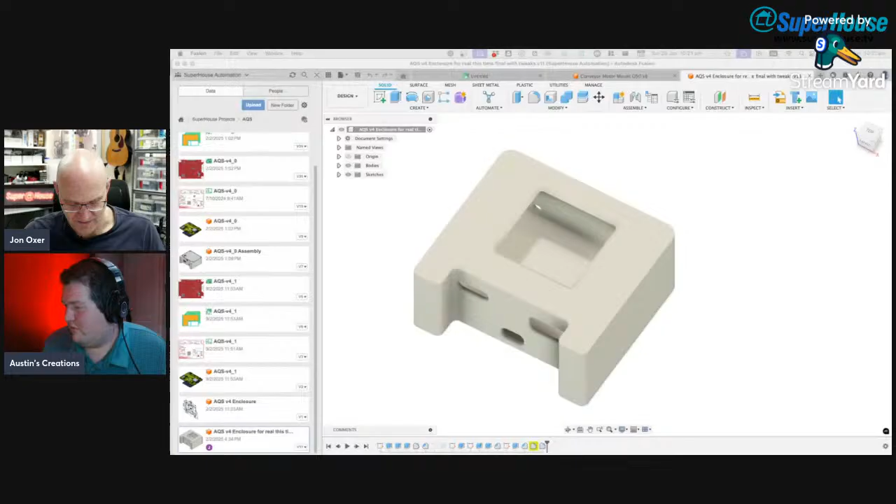I have one of those Launch scan tools, I got mine a while back. I wonder if I can find it, now I know my model's long discontinued, but let's see if I can find it in my Amazon order. So the one I have is the CRP123, and it works fantastically. And then for the advanced stuff, I have my 4 scan on my laptop.

Ooh, case design, yeah. I'm going to suppress those. So yeah, I'm just going to. Alright, I'll explain a little what I'm doing, and then I'm just going to do it without talking about it, and we can continue talking about other things.

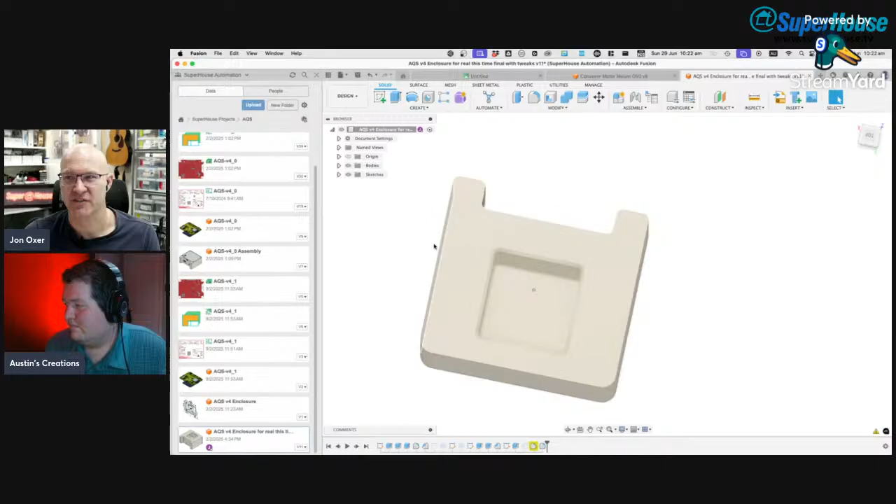What I said to Austin just before the stream is that what I was going to do was do a slight update to this enclosure for the air quality sensor to remove the top buttons. And then I'm going to send the enclosure to the printer. So hopefully by the end of the stream, I have the enclosure that I can show you. So that is all I'm doing.

Body 1, body 2, yeah, body 1. So I'm going to save that as a mesh. And what am I going to save it as? I'm going to stick it somewhere, not there. Where am I going to put it? I'm just going to stick it on my desktop for now, like a caveman. AQ, not AGS, AQS body.

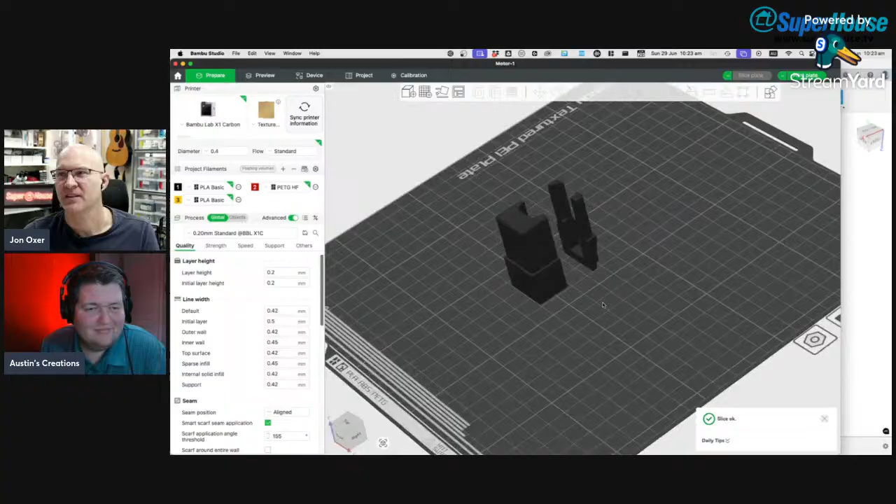And then I can pull it into Bambu Studio. Oh, what is currently in Bambu Studio, because this is what's on the printer right at this moment, is something else that Austin and I can talk about, which is conveyors. This is related to the drive motor for the little PCB conveyor. And I've just, in fact, if I come to device and start the video stream, so we'll have a look inside my printer. You can just see the top of it at the bottom there. That is where this print job is that's just finished.

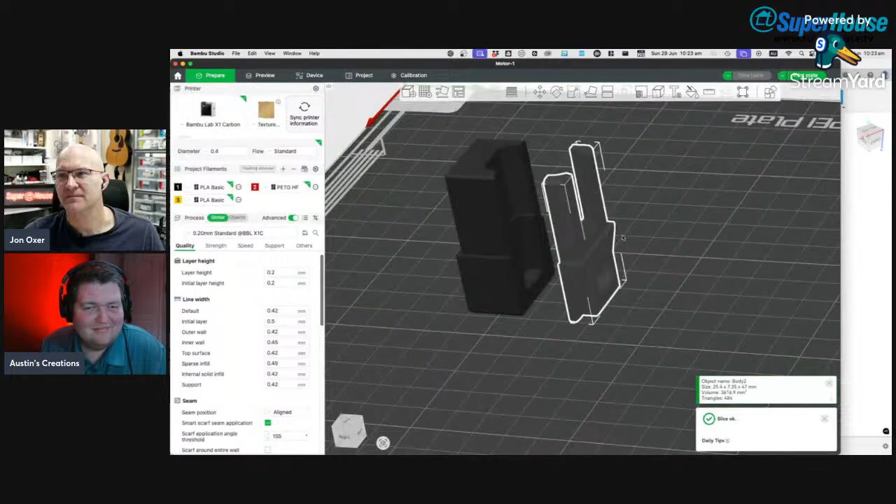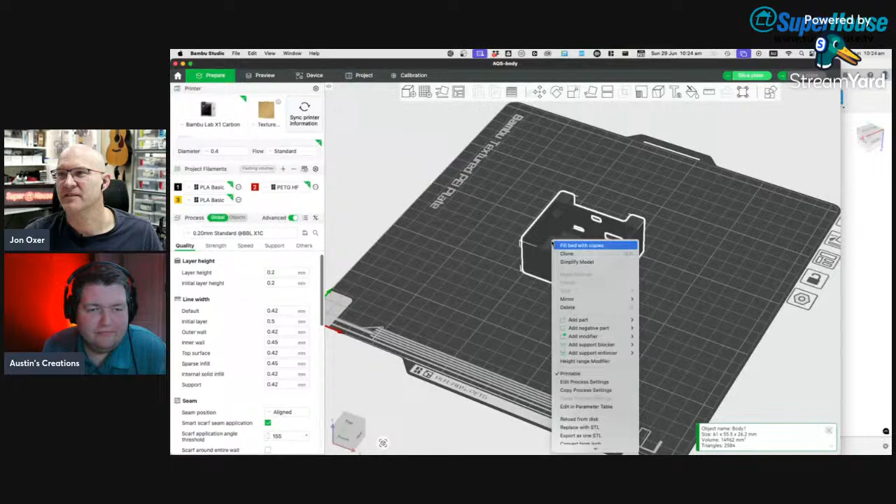So I'm just going to load up, once again, desktop, and AQS body. Yes. And that is the wrong way around. I want to stick it on that face and change it to yellow so that we can see it.

So Austin, I'm going to make you an AQS and send it to you. Do you have a particular preference on color for the enclosure? No, I do not. Okay, I kind of like doing them in white because it makes it look slightly Apple-ish.

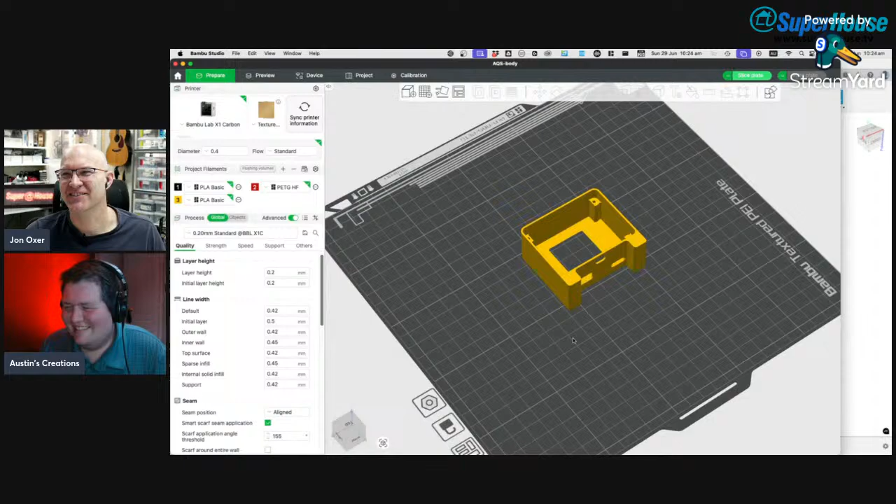Let's avoid white. White doesn't stay white in this workshop. So I could do white, black, yellow, red. I've got hot pink filament which I use for making spray covers, so that'd be hilarious and make it stand out. Sure, why not? Send a pink one. Let's make this a big live stream.

For now, I'm going to print this one in yellow, just because it's easy to see on stream. With black things, if you hold them up like this, unless you got the lighting just right, it's very hard to show on stream.

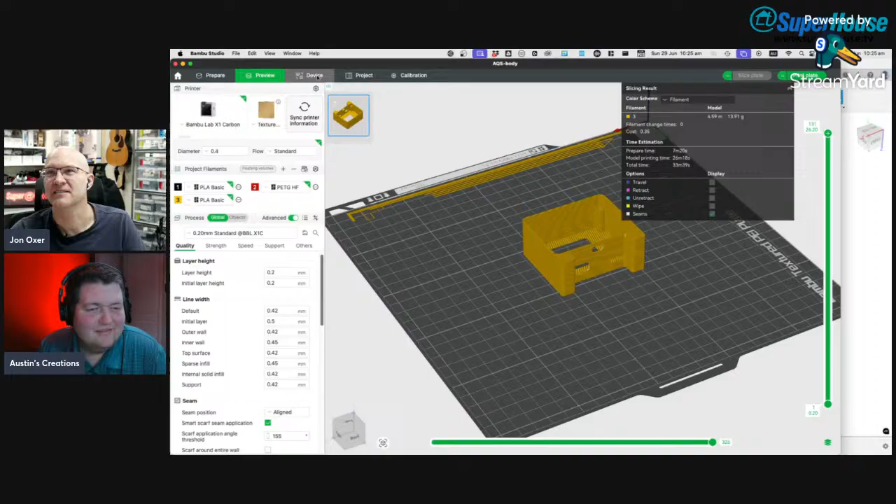So let's send this one off to the printer. Oh no, first I have to get the last thing out of the printer.

So do you want to talk semi-publicly about any conveyor stuff? Because I know, Austin, that the conveyor project you're working on is for a client. Oh no, I'm happy to talk about this one.

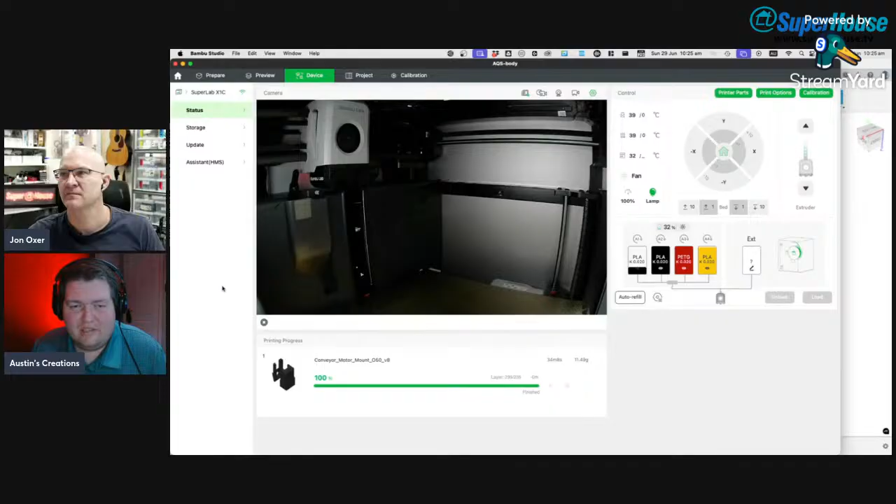It was actually just before coming to Jon's stream, I did some streaming as well. And I was working on a little bit of my project. Actually, do you want me to screen share it? Sure, I'm just going to send this to the printer.

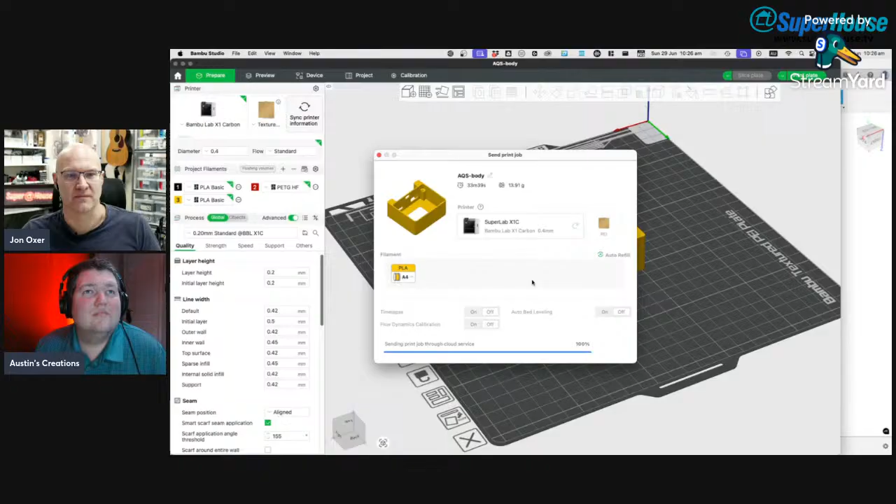That one, PLA, yes. In just a second, I'll pull Austin's desktop up to replace this. I can hear the printer starting, it's doing its calibration thing. Okay, so I'm going to get that out of the way and switch to Austin's desktop.

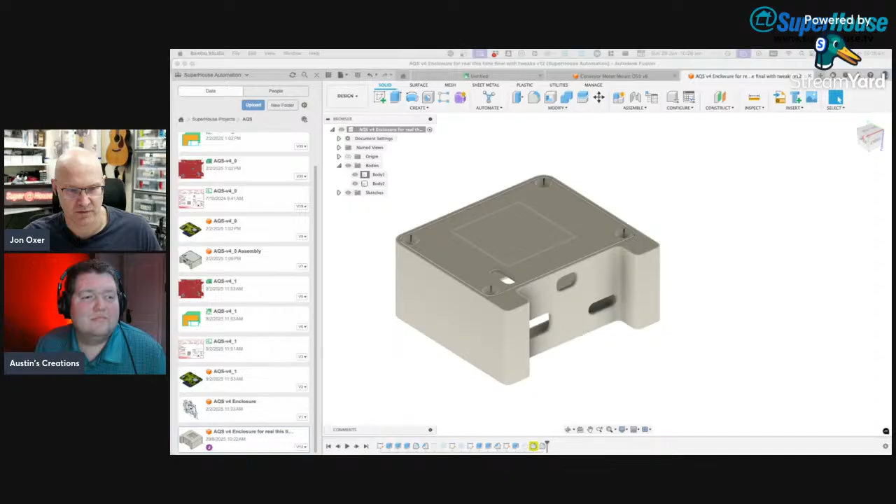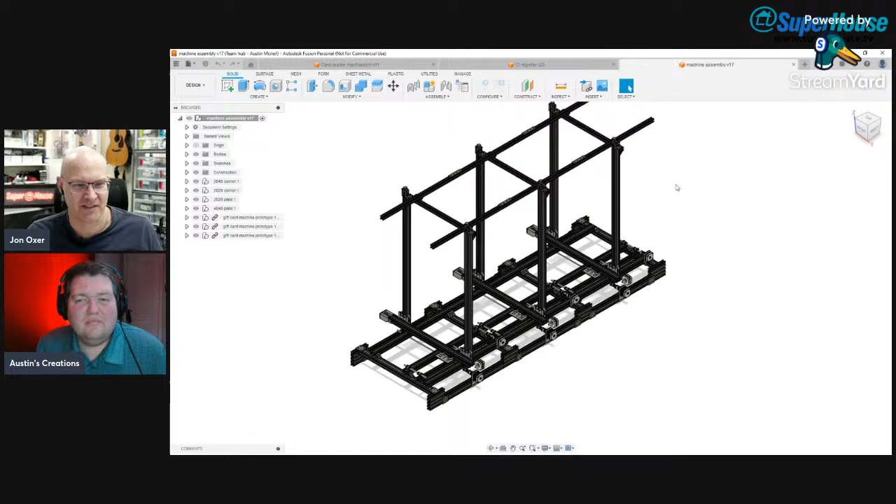I'm going to remove - oh yeah, add to stage, that. Remove, add. Okay, go for it. It's got a comment about, did you unload the last print? I don't need to, unload the last print. Yeah, you did. Yeah, unload. I have it in my hands right now so I can do a test fit. So I'll do that in a moment.

So I have a client, it's a nonprofit. They do handling of donations for some of their uses. Most of them tend to be physical items, although they're trying to get away from physical donations, just because you got to put it somewhere, you got to track it all, and it's a lot of work for people.

One of the things they do, and others do, is they go through gift codes. There can be times where they'll buy their own gift codes as well, simply from a financial standpoint, because they either have surplus budget, or getting credit cards for managers at times can be complicated. And obviously you can't hand out your credit card to a client either. So if you're giving them a gift or helping them buy something, a Walmart gift code can go a long way.

But again, it's when you're talking 10,000 plus gift codes in a year, that's a lot of tracking and a lot of hands-on work, people that have to fill out paperwork. And presumably there's a lot of variation too, because people donating these could get gift cards from any random store. It's a pain in the butt for companies that don't let you check the price on a gift code online. Sitting on hold and punching in numerous code numbers to find out their registered value is so tedious for volunteers.

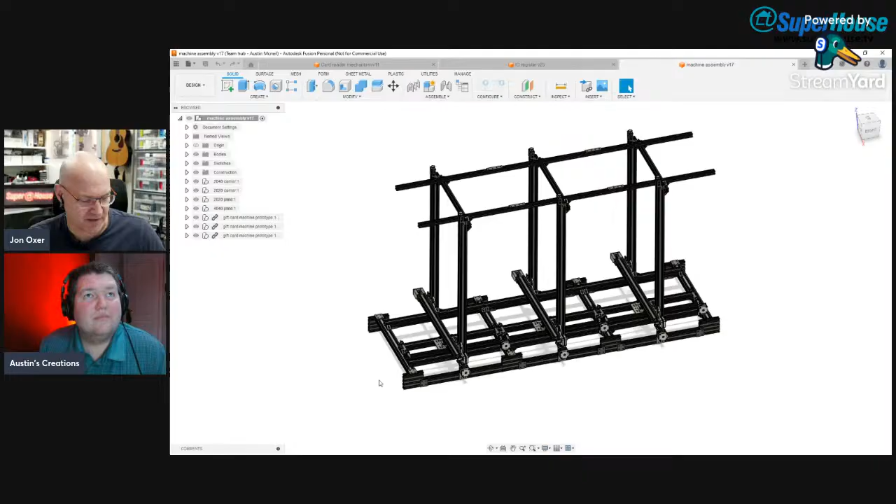So when you say an ATM, what you're talking about is somewhere that someone can walk up with a random gift card, they put it into the machine, and it's then processed to analyze the card, figure out what balance is on it and whatever else you need to do.

Yes. So it dispenses the card? Is this in an internal tool, or is it in a public situation? No, it's internal.

I picked up a 10.5 inch touch screen with a nice glass screen, designed for Raspberry Pis, but it has an HDMI input, so it's connected to a tiny Lenovo workstation machine. With help from Tinker, we found all the small loopholes for locking the machine in kiosk mode, so that as it boots up, all it gives you is a web page that I can point at the server for. It doesn't let you do anything I don't want you to do with it.

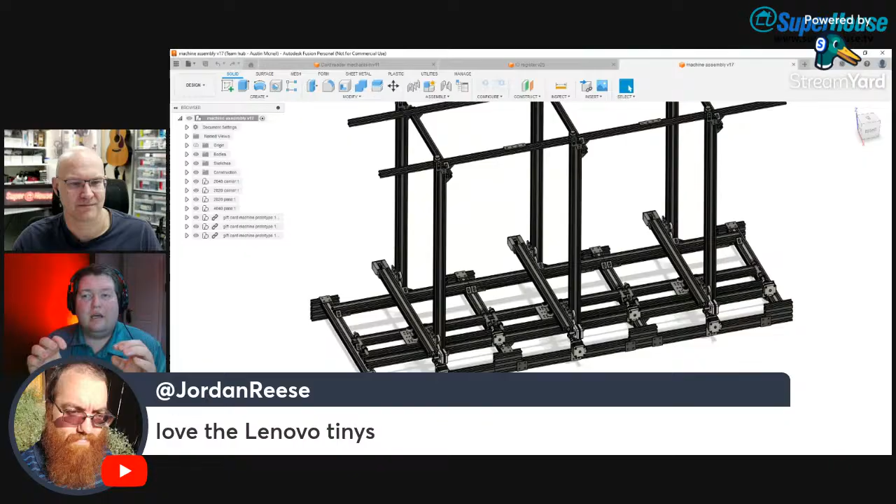And through that, combined with the fact that all staff use an RFID tag for building access and printer access, that will give you access to this machine. There'll be a web page where staff can see the inventory. Through that, they can group codes for a particular client, and the supervisor can go in and approve transactions. Once approved, you go to the office, the machine spits out your order, and you take it away.

As opposed to right now, where there's roughly 8 different people that might be involved in the process of signing out cards. It has to stay in someone's office, and you have to hope there's a supervisor on site with a key readily available. Otherwise, you're waiting around for it.

So it's hopefully going to cut down on hours generating reports, people waiting around for things, and cards that potentially sit stagnant because you don't know they're available. Because if you're getting a variety of brands, sometimes somebody might just be in a rush and not pick something that's potentially more meaningful.

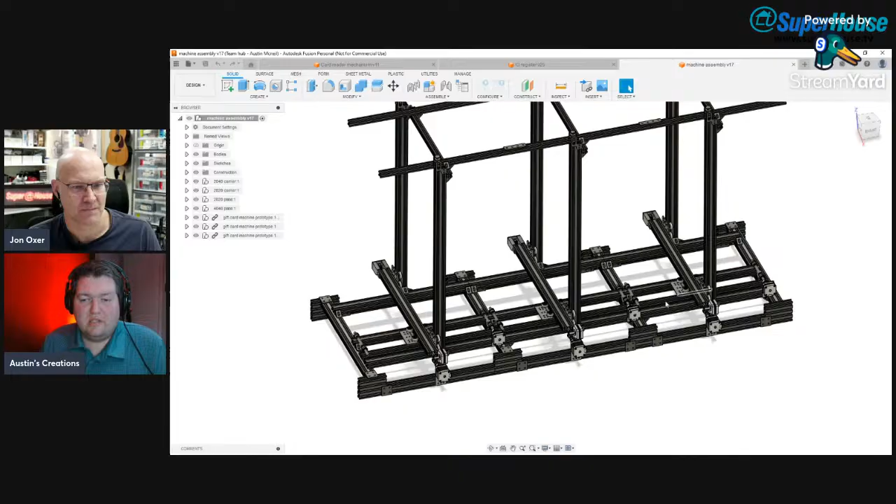So the core of this machine is a central conveyor belt that sits along the bottom here, using standard off-the-shelf 3D printer parts, rollers, and such. Everything has bearings on it so that hopefully it can be durable and long-lasting, but also maintainable and repairable. There'll be quite a few 3D printed parts, but I'm trying to limit 3D printed stuff to things that can sit statically and not wear down and break as easily.

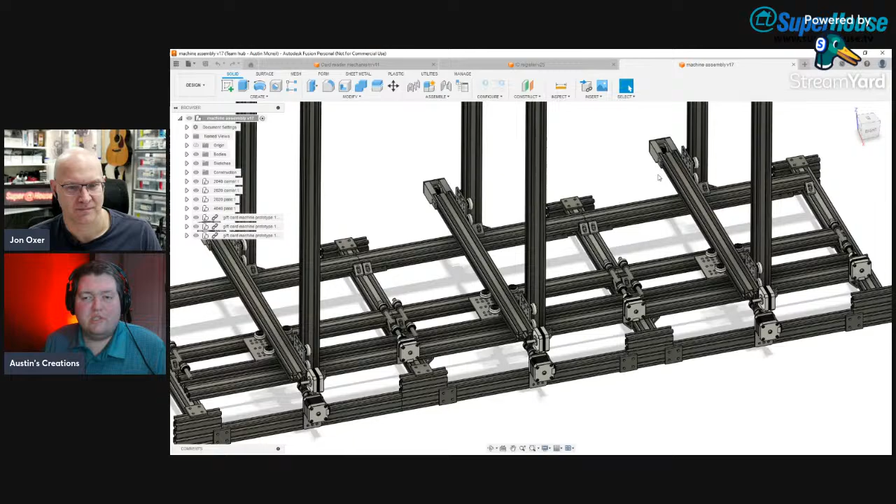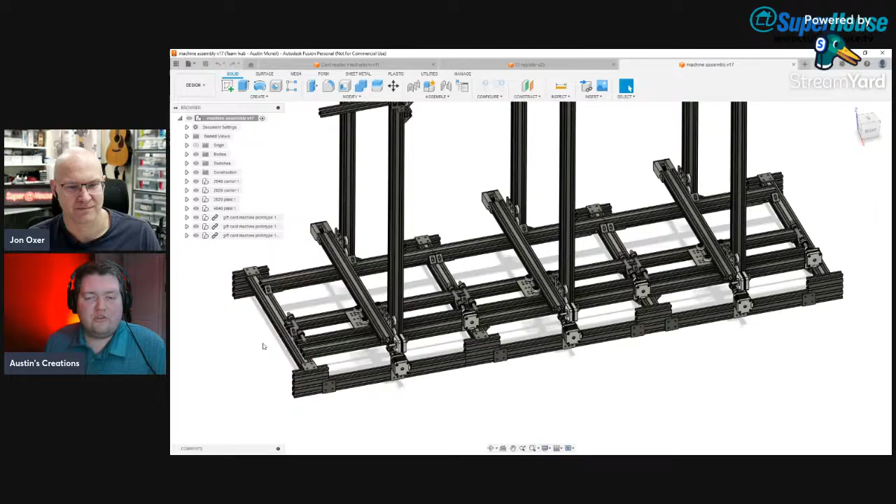With these gantries, the idea is there'll be sets of shelves on both sides, and it'll be capable of picking cards off both sets of shelves. It will query a database to know where all the cards sit and which way to dispense them. The idea is a code comes in one way, there'll be an elevator or something on one end so codes only travel in one direction, allowing for an infinite loop and hopefully faster processing of codes.

To process codes, it leads to this mechanism where you're inputting codes from the front of the machine. The code essentially has to turn 90 degrees, and that's where this turntable comes in. It's got a motorized wheel that'll pull the code in, the turntable can rotate, and then spit the code out through a ramp onto the main conveyor.

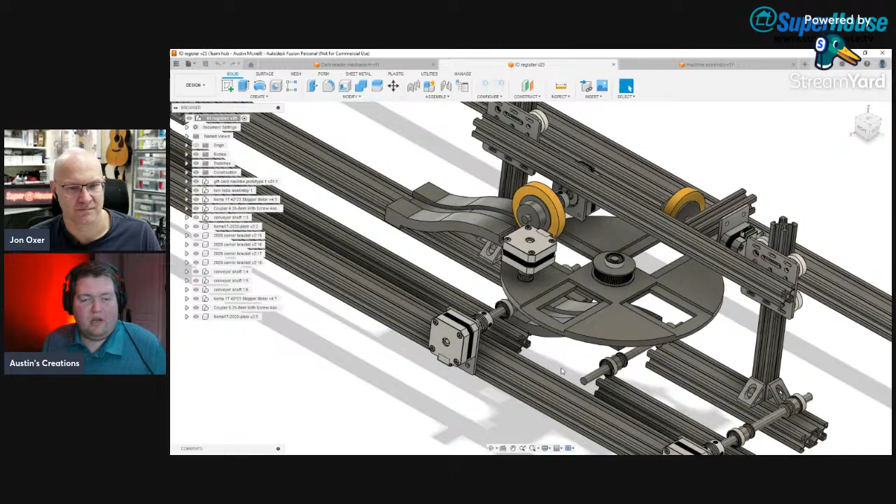The ramp is high enough that codes coming up from the underside conveyor, which isn't currently modeled—this part has to change, it's just a placeholder to remind myself—will come up onto a conveyor belt if it's a code that's actually wanted and didn't misread. It can spit it out and drop it into a hopper for the user to grab, or it can reverse the belt, and there'll be an opening to send the code back onto the main conveyor and then back onto a shelf.

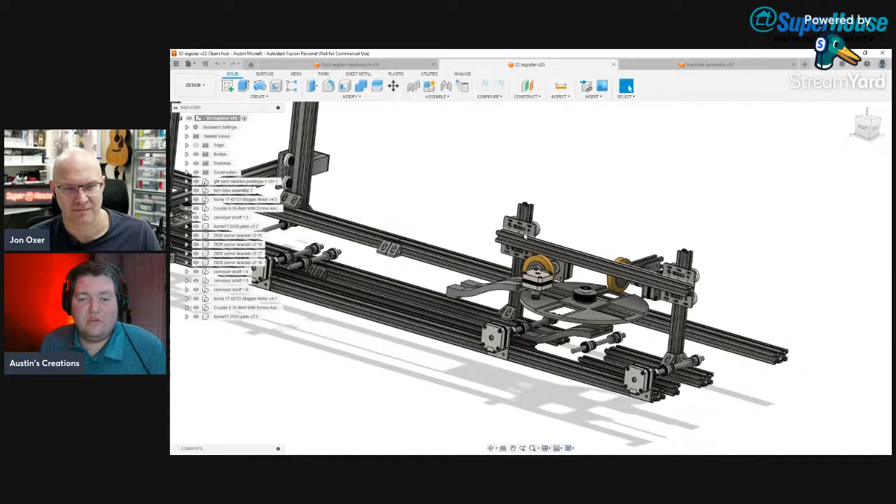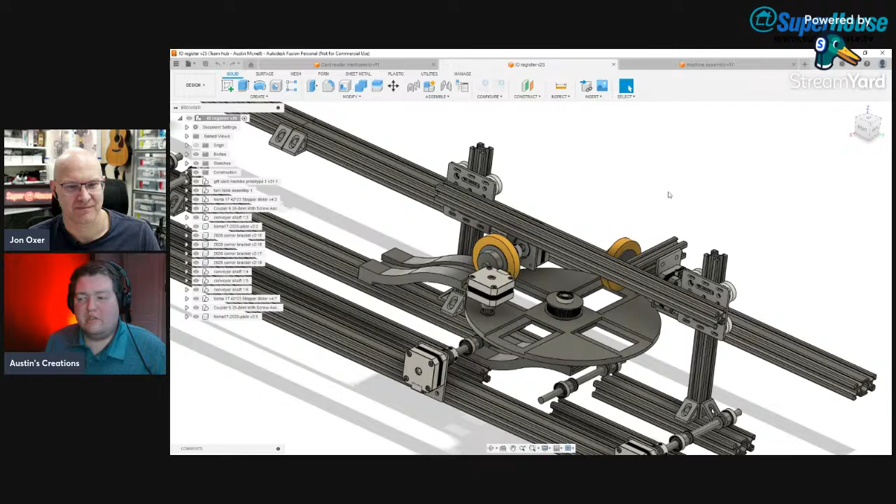The reason these motorized wheels are on these gantries is that I'm going to build a follower cam onto this turntable, so as the table starts to turn, it'll lift the wheels off so they're not dragging against a code or hitting the edge when it tries turning. It's just not something I've modeled yet because I'm focusing on providing the client with a relatively accurate cost sheet, so I'm trying to find all the parts I need first before getting into the intricate parts.

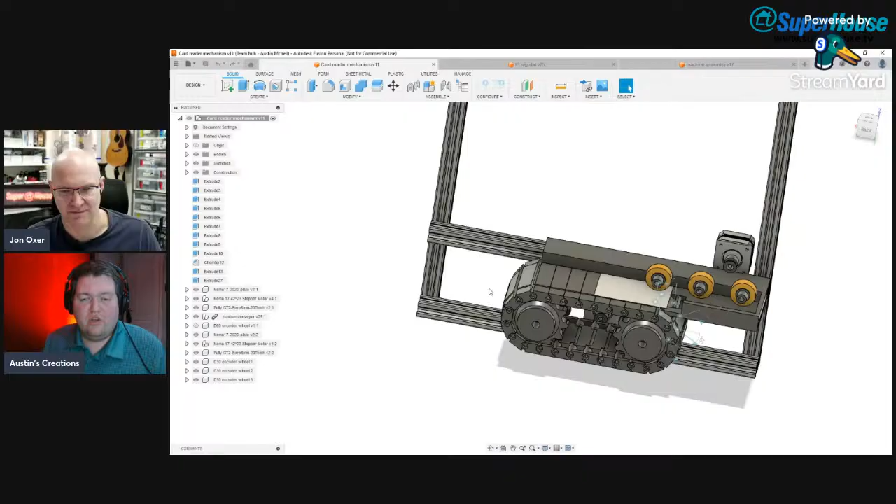But obviously there's a bit of a gap here for the code to come in, and so far the machine still can't tell you what the code is, which leads to the third mechanism—this was what I was streaming a little bit of today—which is I found a model on Thingiverse for a 3D printed conveyor belt.

I thought it was a good design, so I've beefed it up a lot and designed it with a belt drive here. But its main goal is to be able to read a code. So I was telling Jon this before the stream.

The problem with modern gift cards is they can work in one of three ways. There might be a magnetic strip to read, there might be a barcode, or there might be a QR code. It can have any combination of the three - it could have all three, it could have one, it could have two, it could be a mixture.

Ideally, for myself, I find the barcodes and the QR codes tend to be the nicest, not just from a usability standpoint, but the magnetic strip read head is only good for a certain number of cycles. So you also want to limit that cycling if you can.

But the annoying thing with gift cards is the only two things standardized on a card is the magnetic strip - the type of data it has, the order of that data, and its position on the card - and the size of the card. Those are the only things that are standard.

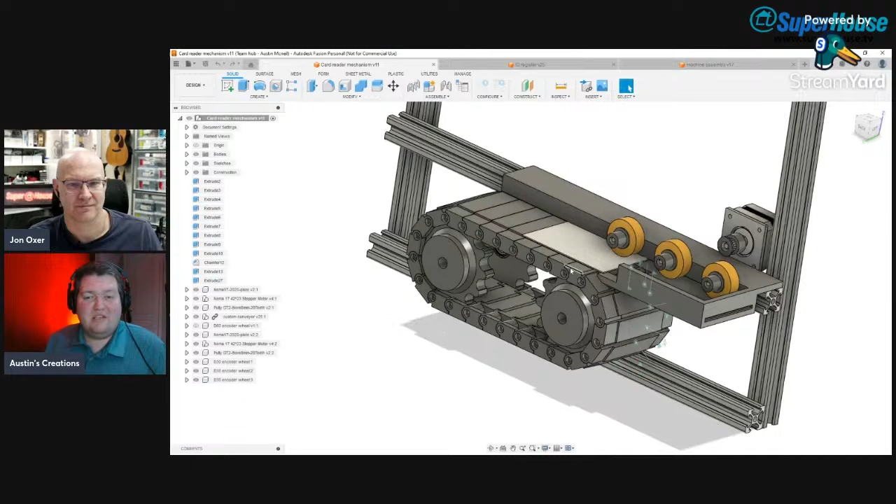So the problem you run into is if I wanted roller wheels to push the card along a set of rails, the wheels are either going to block the magnetic strip or they're going to block the barcode and the QR code, because they can be anywhere on that card in any orientation that the manufacturer decides. If I put the wheels on the bottom, it needs something to push against, otherwise it's going to distort the code. And if I try to put any set of rails anywhere, again, I could end up blocking the data I want to scan. So my best bet is some sort of belt.

So I started modeling this belt in a way that it has this pusher arm. There'll end up being more links that have the pusher arm, so that once the code has gotten into place and it's past all the roller wheels, the belt itself can push the code along into a position that I want. There'll be a magnetic read head that I'll design to actually fold out of the way, so it's only being worn down when it's needed.

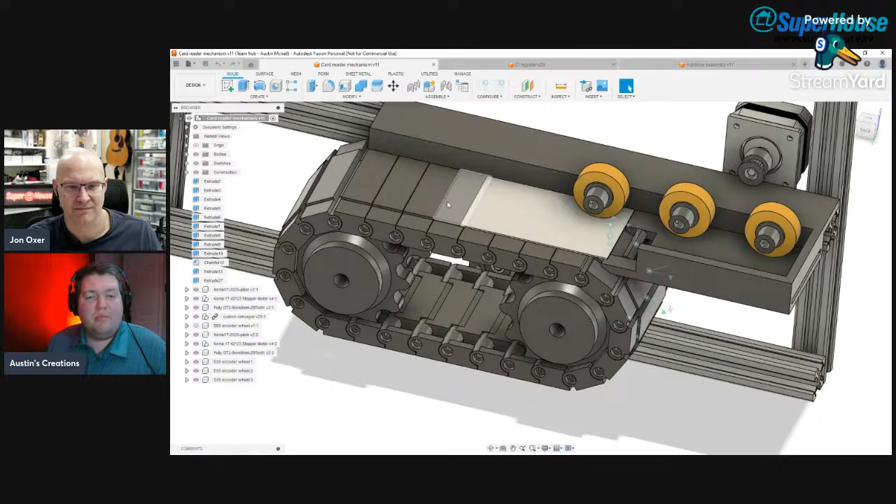And then this pusher would just ramp up the speed of the motor to push it at the right speed that it can read. Otherwise, it can stop in a position, and there will be a gantry that sits above that can hold the scanner module that can read the barcodes and whatnot at the correct read distance and be in position, but also move should a card decide to have the codes in a different spot. And this module is essentially what's going to handle cards going in and out.

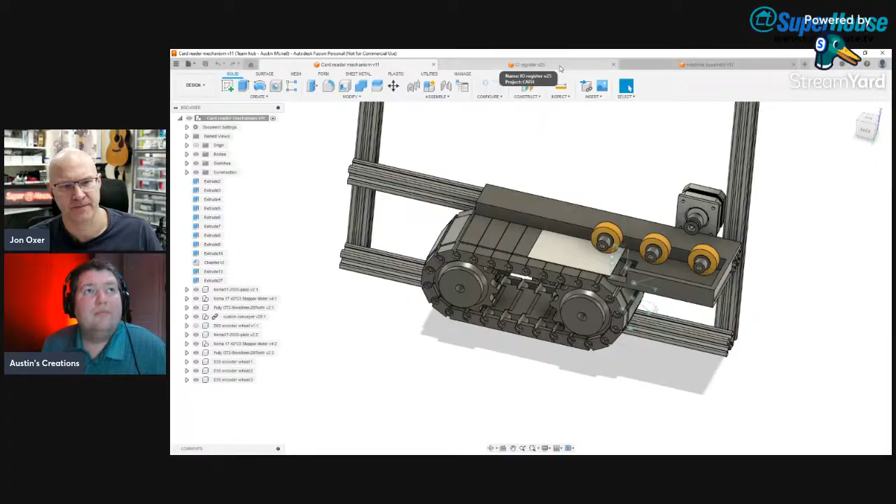So ideally, I'm going to handle it in a few different ways. I kind of want to build a JSON config file that'll have the various codes, and that can... what do you call it... dictate where it's looking.

But so even you would have pre-configured card types - you're not talking about a situation where you're dynamically trying to detect where the read location is or the location of a barcode. I have found even with the readers, sometimes it helps moving it slightly, so like that little bit of jitter would be programmed into it just to help it actually center itself. But in general, I would tell it like, I'm trying to see if I can find one of the codes. Most cards have the barcode along the long edge.

I did see one in my collection here - like Amazon has started using QR codes. Yes, I'm showing the cards on camera. They have all been used. You're welcome to waste your time.

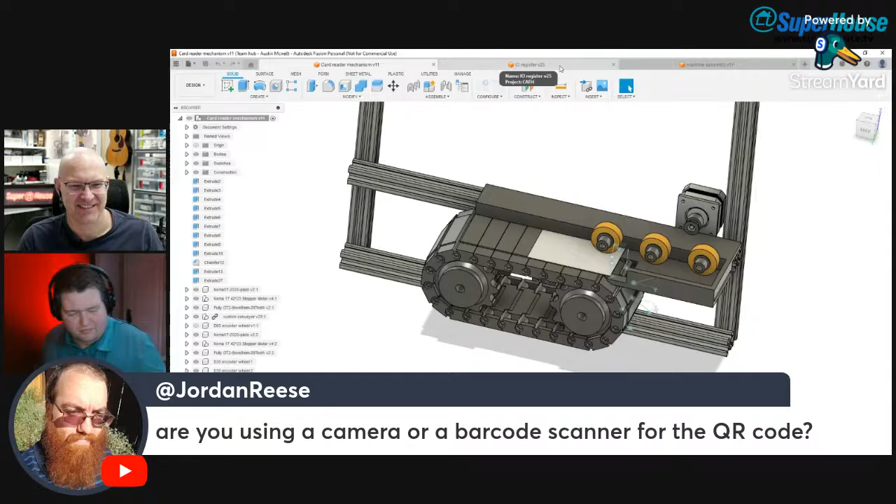So Jordan asked whether you're using a camera or a barcode scanner for the QR code - I'm using both. I have a camera-based module. It's the same module used in my inventory scanner.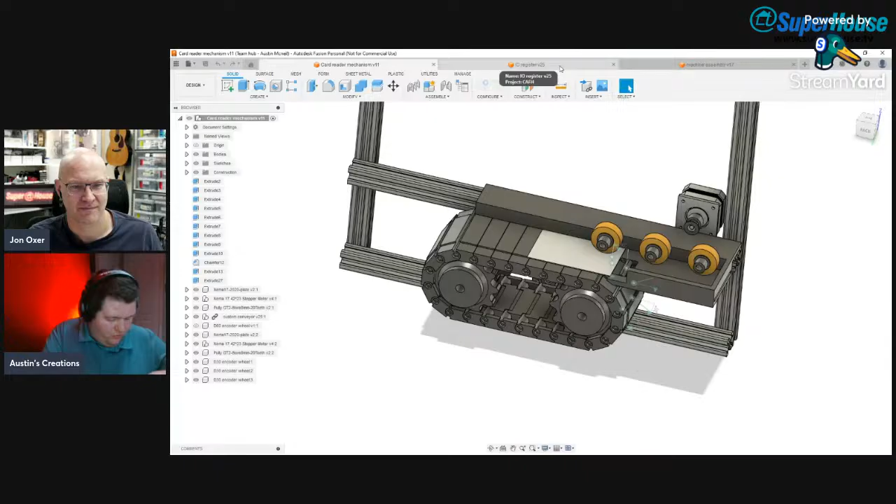But I found the camera module has to be way too far away to read the barcodes, especially the ones that are ridiculously long. And then this is an example of a code that's put sideways.

And then you have this one, which is a camera based module. This is capable of reading QR codes plus barcodes. But if I wanted to read a barcode like this, I'd have it easily 200 millimeters away in order to read it, and you'd be doing this to try and get it to align, and it won't work. You definitely won't read the, I think it's like a 10 by 10 millimeter QR code, so you've got to have this thing right up on it. So rather than using one or the other, I found it's just better to use both, at a more appropriate height, so I can deal with the different situations.

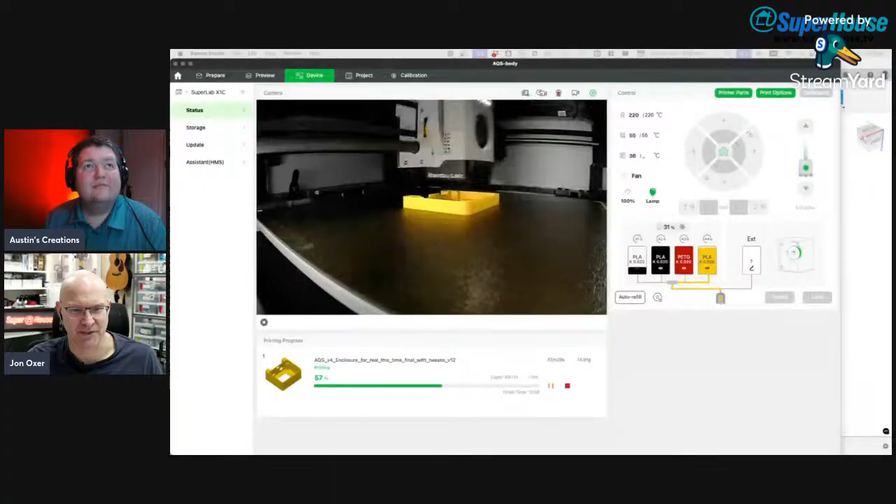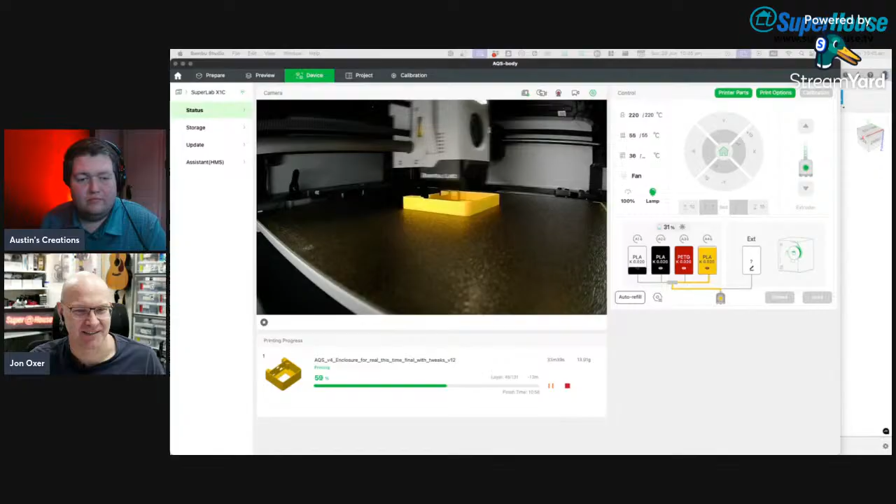That's really cool. I'm just going to briefly bring this up. So this is the progress on printing the AQS enclosure. Where are we at? We're at layer 44 of 131, 58% done. Those two numbers do not seem to compute, but that's because most of the printing was in the first few layers where it was doing the front face, and now it'll rip through the last 90 layers or so pretty quickly. So we will return to that.

And the other thing, okay, so there was an interesting... sorry, my brain just did the thing where I was saying something, and as I was reading a comment, words from the comment ended up coming out in my sentence. So it probably didn't make any sense.

Back here, where are we? This one, yeah, from Any Mules: has there been some merging of projects lately? How about a PMS module that connects to a SQUIXL to make an AQS? I saw this comment earlier while Austin was doing his demo.

And so what I ended up doing was, my SQUIXL right now is in the process of doing a firmware update. I have the SQUIXL in front of me. I haven't done this before, but I believe the SQUIXL can subscribe to MQTT topics and display values on screen - you can create a widget, I think that's what it can do. It didn't - that feature doesn't seem to be in the current version.

Tinker just said in my ear, next you'll be saying what you hear from TTS. He's really trying to mess with me. I'm just a puppet, I will just say whatever people say through TTS.

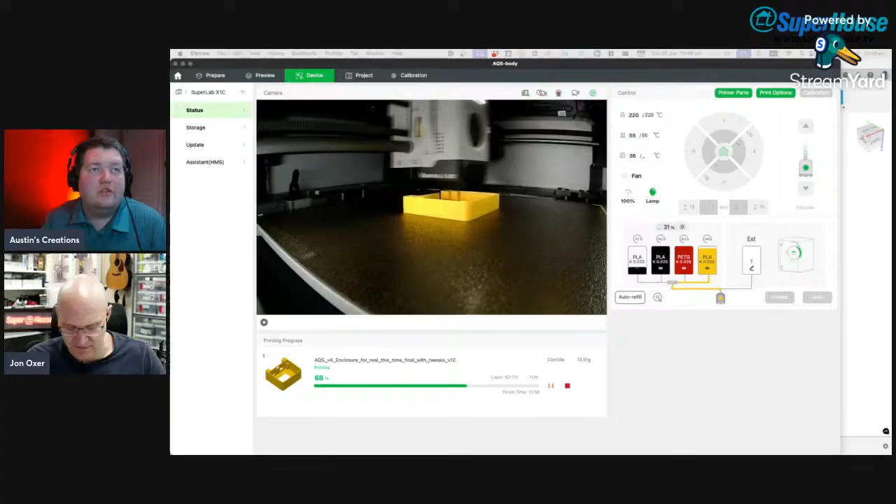Yeah, because that'd be the other option too. The firmware is set up to send that data directly to Home Assistant, so you don't have to do any setup. Once you're in the Oxos admin page, there's a button to click, and it automatically enables Home Assistant to find your device.

Okay, well since we have now fallen over the topic, totally by accident, I don't know how this happened. This is wrong. Like Henrik just said in speech, in TTS, how long the update takes. Yeah, I'm actually a little concerned that something has broken, because it's been sitting in preparing installation for probably the last 10 minutes. There is something wrong.

So I think what I'm going to do is take my SQUIXL off. Oh, Jordan said, I was only gone for a couple of weeks. How did I miss whatever a SQUIXL is?

A SQUIXL is a project from Seon, Unexpected Maker. Hang on, I'm going to remove that, I'll link it in the chat. It's basically a square LCD touchscreen, so you can see it's got a touch interface. It's got an ESP32 in it, battery management, and there's a magnetic connector on the back so you can click it onto a charge dock. Imagine halfway between a mobile phone and a tablet, except it's ESP32 and you can create your own widgets and things for it. It's got a magnetic charging thing on the back. It is very beautifully designed.

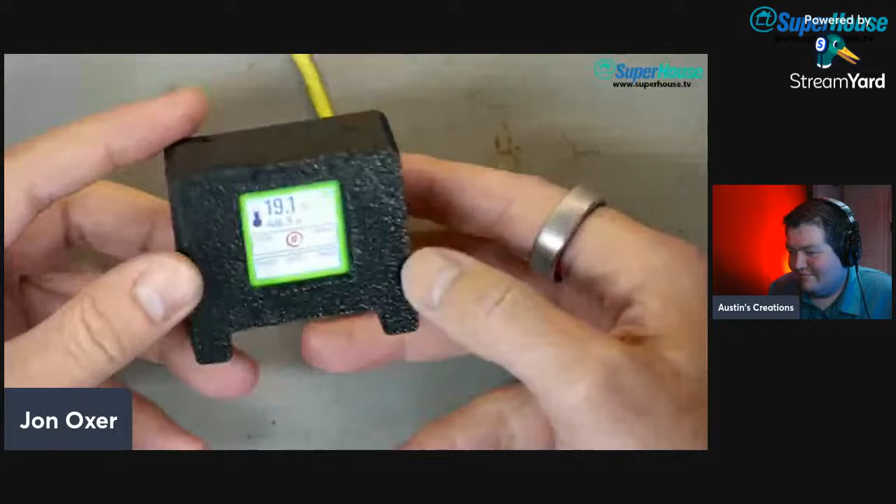All right, so this is the air quality sensor with the firmware that Austin wrote. It's just in this enclosure at the moment. This is the previous version of the hardware. The only difference really is that I changed the orientation of these buttons.

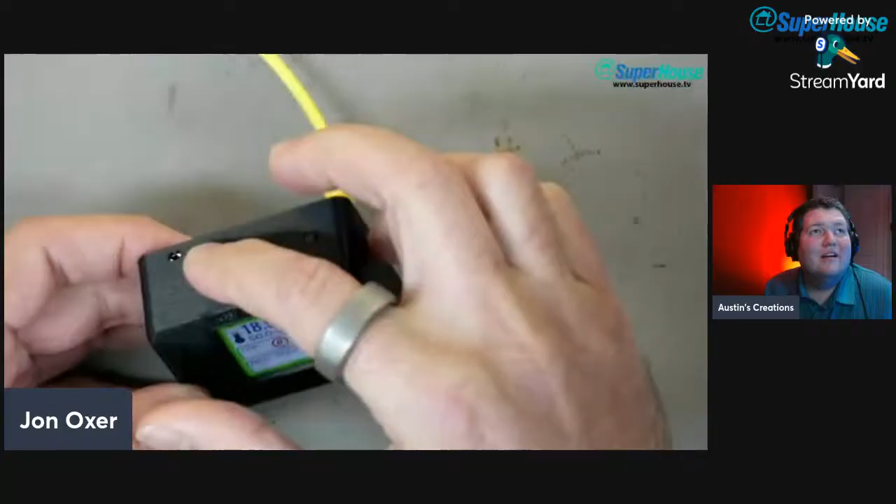It's just a minor change. With this one, what I had was buttons that come up through the top of the enclosure, so when it's sitting on a bench, the buttons are on top. But the thing is, you don't really use the buttons every day. You can use them to switch into different modes.

And they report to MQTT as well, those buttons. Yeah, but most of the time they are not something you want to access. One of them is reset, the other is just the action button.

So what I did was change the orientation, so the buttons come out the back now. Instead of being right-angle buttons that come up through the top, they're straight and come out the back. That's why I deleted the holes on the enclosure I'm printing right now. So the proper version, the next iteration of this PCB, which I have physically here, has the buttons out the back. But apart from that it functions the same way.

Electrically it's identical. And you can see that Austin's firmware has a border around the screen, which in this case is green, meaning I am in a happy place right now. It's got some values displayed. Because I had to unplug it to move it over to this bench, it's only been running for a minute now, so it hasn't yet had time to acquire data for CO2e, BVOC, PMS, etc.

So we've got 17.8 degrees here, 65% humidity. I'm surprised at how high that is. That is actually kind of high. It's cold outside and it has been raining for the last several days, so it is very wet around here. But yeah, I suppose that makes sense, 60.9% and falling.

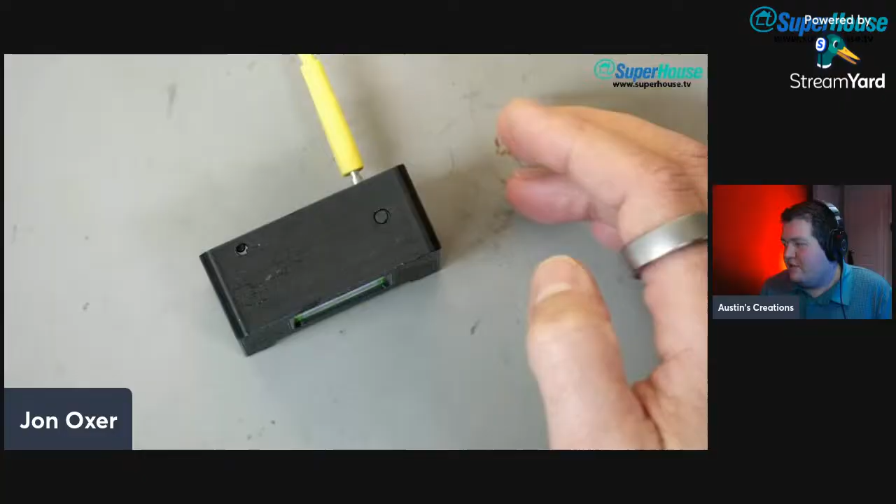So we're getting updated numbers coming through from those now, but at the moment I'm not getting any values off the PMS. I have the code on GitHub but haven't pushed a release yet. I think one of the things I needed to fix was if it was having issues communicating with the PMS, I wanted it to put a notice there. But it might be that it is communicating and I don't have it properly handling the fact that it's spitting out a 0. So that's something I need to check.

So what I'll do now is press the reset button and let it go through the reset process so people can see it do that. If I can find that button - where is it, slightly offset from the hole. Go press it, there we go. So it's reset, starting up, and it will go through its process of connecting to Wi-Fi, initializing the sensors. You can see the Wi-Fi symbol is red because it's not yet connected, and now it's gone green.

It's come up with the display, and it's already got data from the BME680 - we've got temperature and humidity, and other values should follow. I'm just going to leave this sitting on the bench right here and switch back to the regular view.

Oh man, that's really zoomed in. That's more than I realized. Can I move it around so that it's at a proper distance or not? Well, while you're experimenting with that, I'm just going to go and grab the print off the shelf, off the printer.

Oh, it looks so cool in this yellow. The yellow filament I've got is like an egg yolk yellow - really deep, rich color. It's not a bright light yellow, and I really like this color.

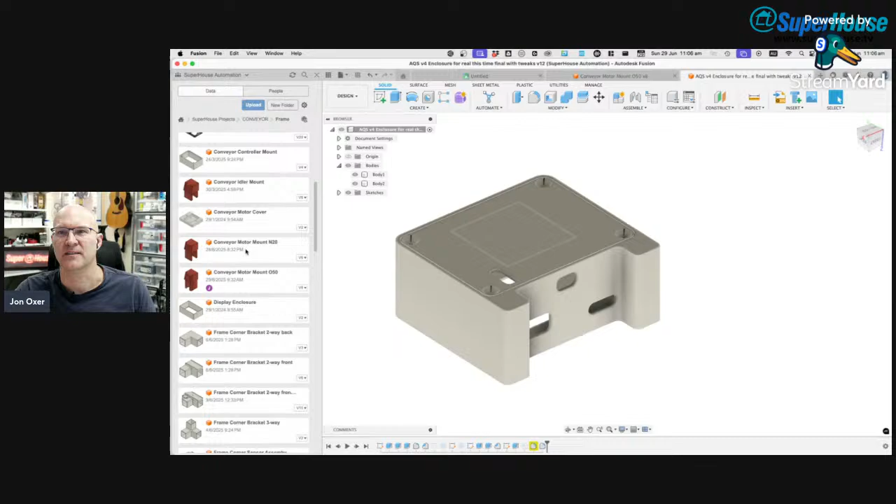And the way the structure is set up, if I have a look at the conveyor motor mount N20, I've already got the new one open. This is an end cap that I was using previously, so this is what the current version of the conveyor uses.

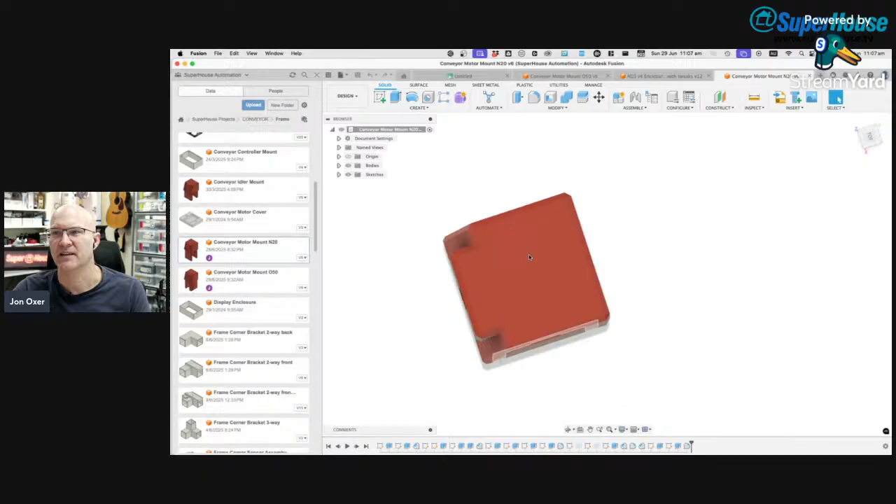The reason it is shaped like this is that it slides into the end of a piece of extrusion, and it has a hole in it to mount an N20 motor, which goes in through the back, and then the motor shaft protrudes out through here. A couple of screws go in here to hold the motor in place, and then a back cover goes on, and the wire routes out down through here. So that's the way I've been doing it for basically since I started this project.

And now I need to... computer crashing, oh no. Austin just sent me a photo on Discord. He's taken a photo with his phone and sent it to me of his computer crashing. Hopefully it all comes back soon. I'm just going to send him a message.

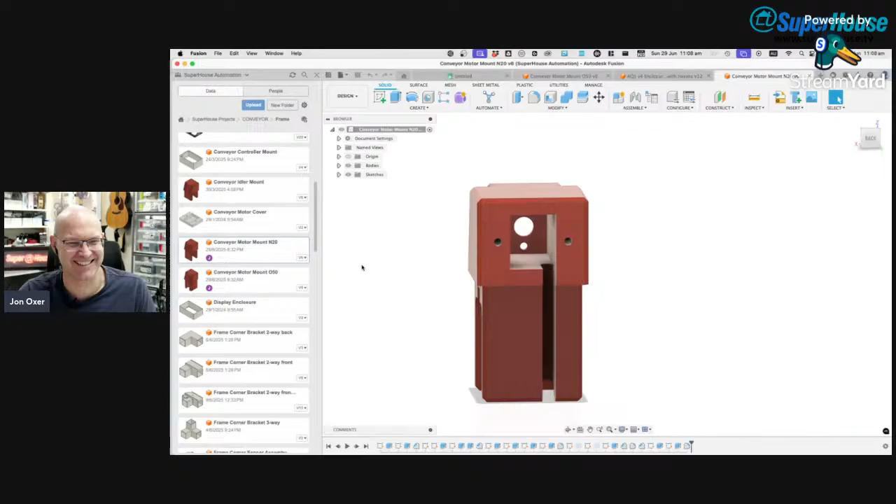Yeah, okay, just behind the scenes sorting things out with Austin. Now, this is the old version. The problem is when I have the conveyor belt running into the reflow oven, it moves very, very slowly, like the conveyor belt is just barely perceptibly moving.

And if I run onto it from another conveyor belt, I need to... oh no, Austin just sent me a message and then it decided to do an update. Thanks, Microsoft. So his PC crashed, and then when it came back, it decided that it was time to do a Windows update. Nice one.

Poor Austin. So the problem is that if the conveyor leading into the reflow oven is moving too quickly, boards end up in a situation where they get onto the start of the reflow oven conveyor, and then the conveyor that's loading it starts slipping underneath the PCB. The PCB stays there in a static position, or nearly static, covering the board sensor, so the conveyor doesn't know that it is partly off.

Austin's computer balked, yeah. And then other boards behind it on the conveyor can catch up and bash into the back of it, and then there's no gap between the PCBs, and the board sensor doesn't detect the edge. Anyway, it all goes really badly wrong.

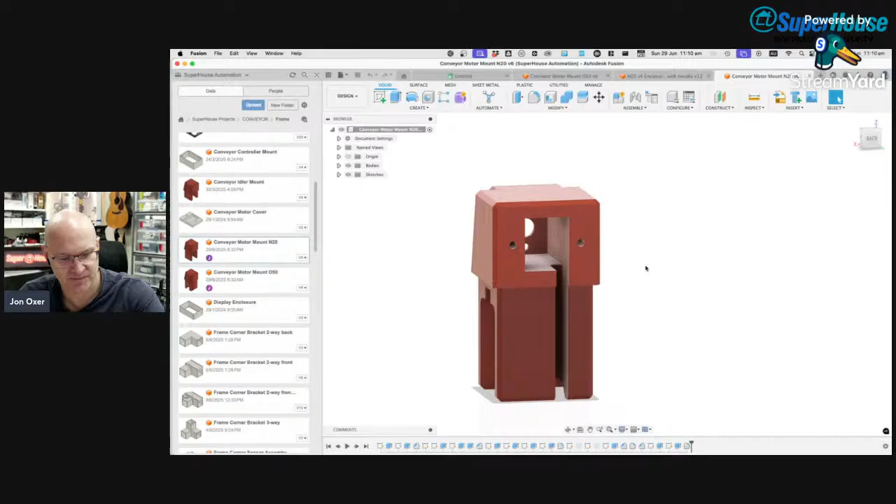Okay, that's better. And so I started looking for alternatives. One alternative is to switch from using a DC motor. Just wondering if I've got an example of an N20 here. I should have one because I want to show you the difference between the N20 and the O50, which is the motor I've just switched to.

So the N20 is just a regular brushed DC motor, like a tiny little hobby motor. It's very small, doesn't have much power, running into a little gearbox, and that's how it gets its torque. It's just a very high revving little motor running into a gearbox in order to give it the high torque at the cost of speed.

And the alternative is to do something like switch to a stepper motor. I could use something like a tiny NEMA 8 stepper, perhaps, mounted in such a way that the shaft can come out sideways. What I should do is bring up on screen this.

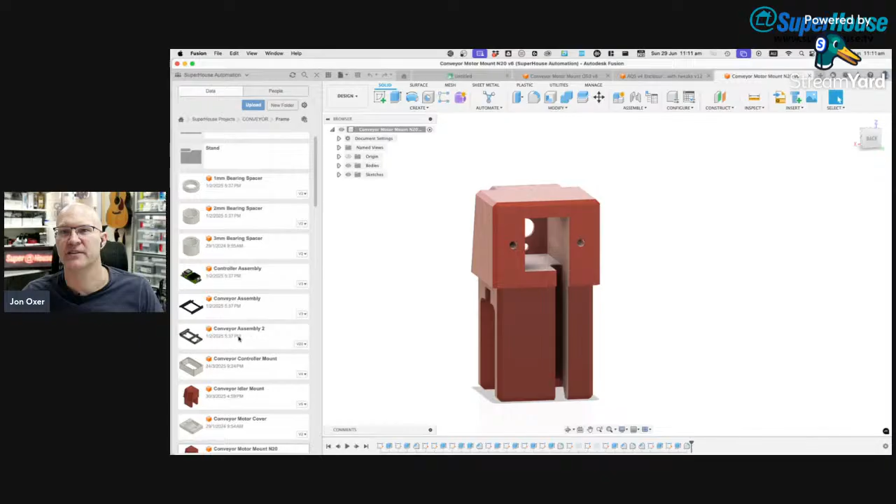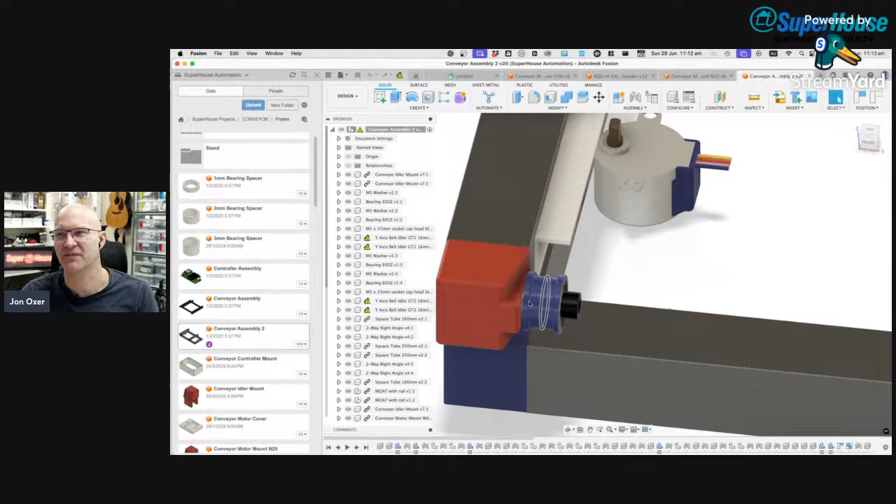This gives you a better idea of what I'm talking about. So what you can see here is the end cap. This particular part has an idler wheel on it, and the motor goes at the other end. On this model I've got two idlers, which obviously wouldn't work since there's nothing to turn the conveyor. Normally there's one with the motor - this is the N20 motor in the housing, inserted into the end of the aluminium extrusion here.

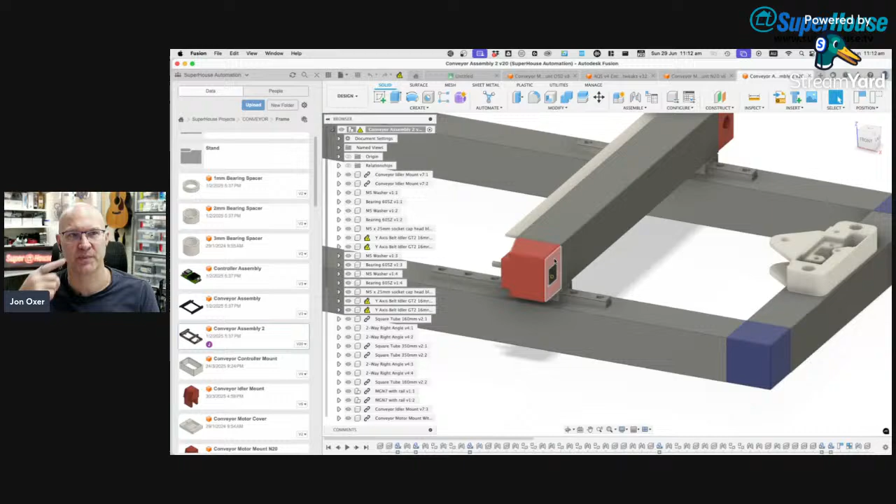What I could do is replace that with a stepper, which would give good torque at very low speed. I could run it at extremely low speeds or speed it up to get decent speed. But what I've also been experimenting with right now is the next size up from the classic N20 motor.

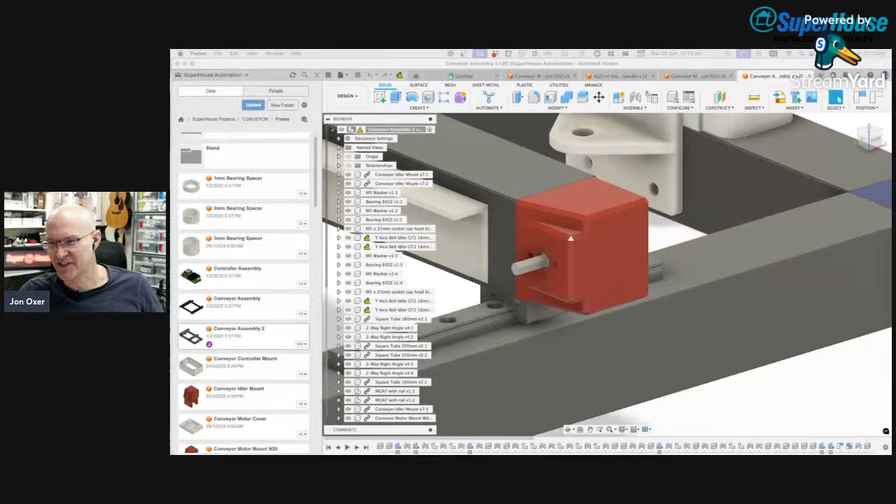There are times when I wish I had a producer - this is one of them. All right, I'm going to bring this up full screen, because I'm going to go grab an N20 motor. I'm going to go for a little walk because I need one to show you. I'm really surprised I don't have one handy, sitting where all that stuff is. This is my N20 O50 box. Yeah, I should have one sitting there, but I think I've put them all away because I'm actually being neat for a change.

5 volt, 100 RPM. Yeah, it doesn't matter which one - this one will do.

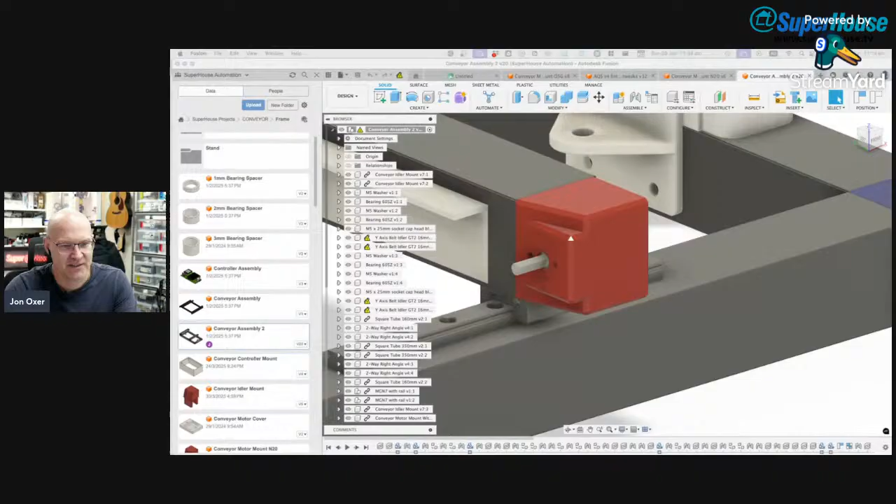So what I have here is an N20 motor. And back to the conveyor - how am I going to do this? I really have to think this through because this camera setup is so strange. All right, I'm going to switch to that view and remove that. Hey, that works, amazing. So this is the N20 motor.

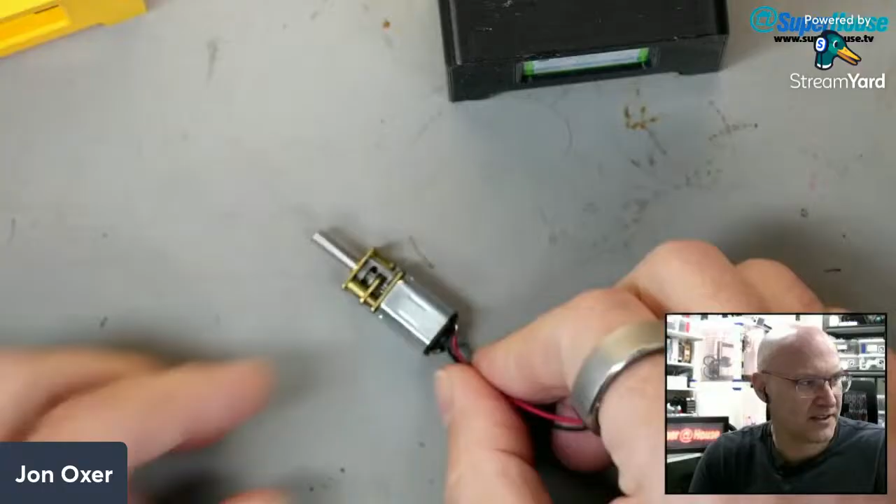Tiny, as you can see - a tiny little hobby motor with a gearbox on it and the output shaft. What I found was these: this is called an O50 motor, at least I think it's an O50 compared to this. You can see the difference in size of the motor itself, and the gearbox is a lot bigger. It's very much the same concept as the little N20 motors you see everywhere, just a scaled up version. This one is a 12 volt version, and I'm not sure what the gearbox ratio is, but I think the end result is that it's rated to a rotation speed of 29 RPM.

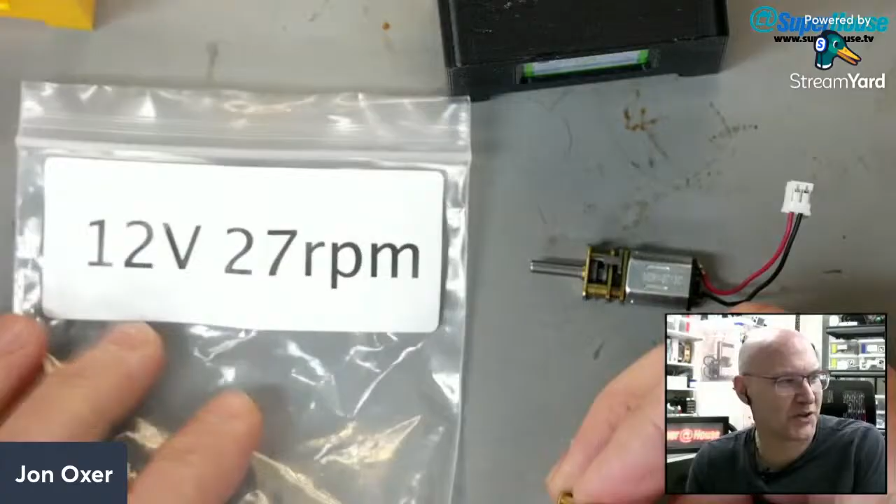Is it 29? No, 27, okay, this is my box. I labeled them because I've got so many different variations of these motors that I need to keep track of which one is which, and they're not labeled - you can't tell. These are 12 volt, 27 RPM, so with 12 volts into it, this will run at 27 RPM.

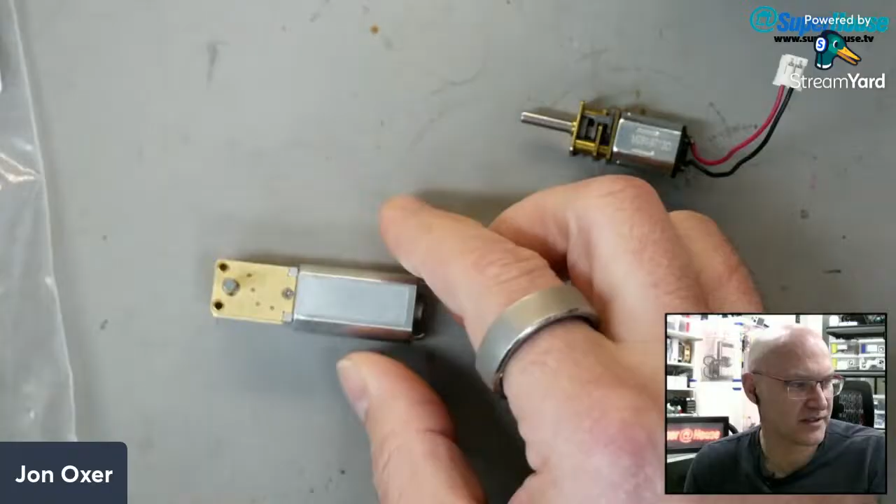What I've found is that if I turn on a lab power supply and power this up, I can run this down in sort of the 1 to 2 volts region, and it's just barely turning the shaft. It's really, really slow, but it still has enough torque that I can't physically stop it. It's got a flat on the shaft here, so I can get a pretty good grip on it, and I can't stop that motor with my fingers - that's how strong it is. So going from that motor to this motor is what I'm hoping will give me the torque I need at low speed to make the conveyor run reliably.

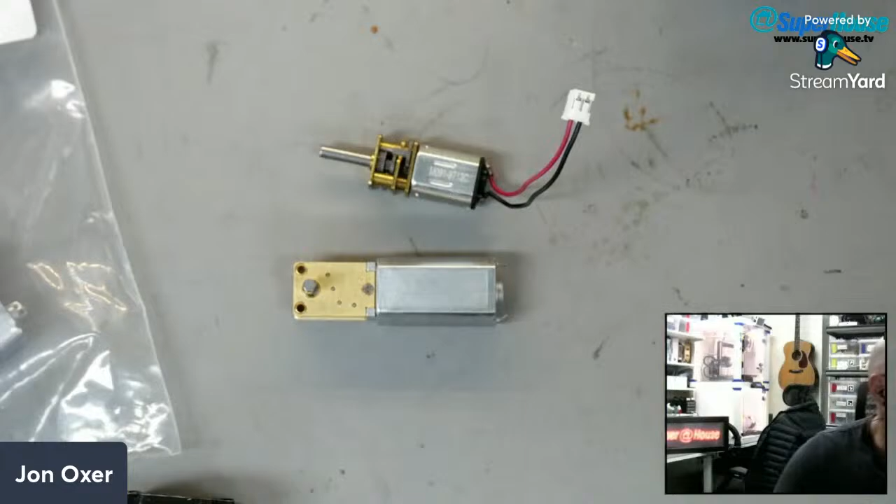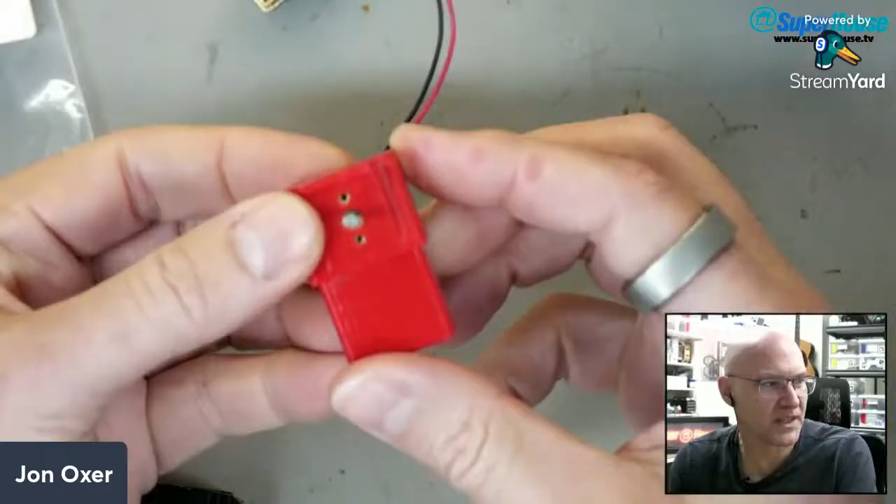But that means the end cap has to be redesigned. So what I did was take the existing end cap design - I do have one here. So this is a print of the N20 type end cap. The motor slides in from the back, and then a couple of fixing screws go in here. The cable goes down - this is an old one, so it doesn't have the cable routing. On the updated design there's a slot for the cable routing and a back cover. So that's the N20 style.

So I took that, hacked it around a fair bit, and ended up with this design, and it's a single piece. The model started off as a single piece, and then I created an offset plane and sliced it into 2 pieces for printing and access purposes. The idea is that I print this as 2 halves, put the motor in the middle, sandwich it together, and then the motor shaft comes out there. I've done, so far, 3 versions of it.

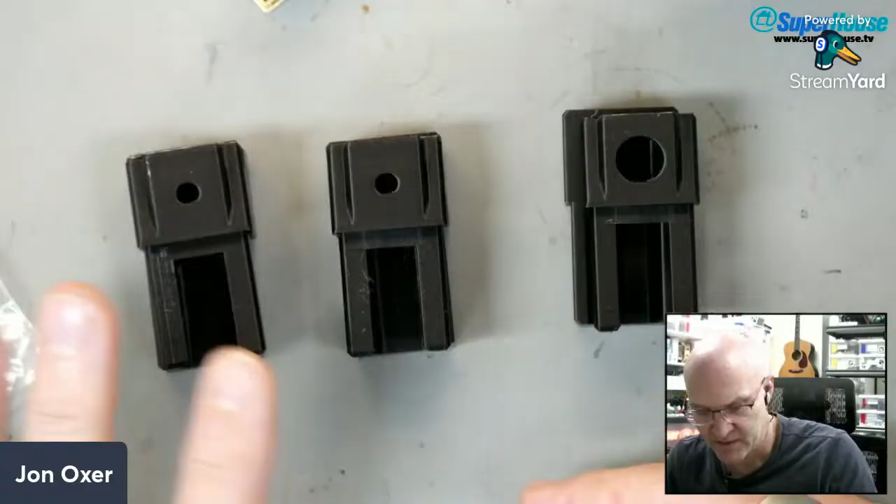I just started on this last night. That was the first one, which didn't fit very well and had some issues. So if I put that on, you can see there's a bit of a gap in there. You can just see the silver of the motor coming through.

Oh, looks like Austin is back. He's back online. All right, I'll bring him back on stage in just a second.

So you can see that the fit wasn't quite good, so I tweaked it a bit, and that resulted in this version, which was better, but still not quite there. I wanted to make some other changes. It's hard to tell, but if I clamp one side down, there's a slight gap on the other side. It's very close to being the right fit.

I also wanted to increase the clearance for the gear that's a press fit that goes on. This is the one I just grabbed off the printer at the start of the stream. I started it printing this morning, and the motor sits in there, and that clamps over the top. This one looks like I finally got the fit just right. It slides into the end of the extrusion with the motor shaft exposed coming out sideways.

So my next stage is going to be putting a couple of wires on these and substituting these into the conveyor in place of the N20 motors.

So now, hang on, I've got to slide back over here, switch to that, and then I can bring Austin back on. Hey, welcome back.

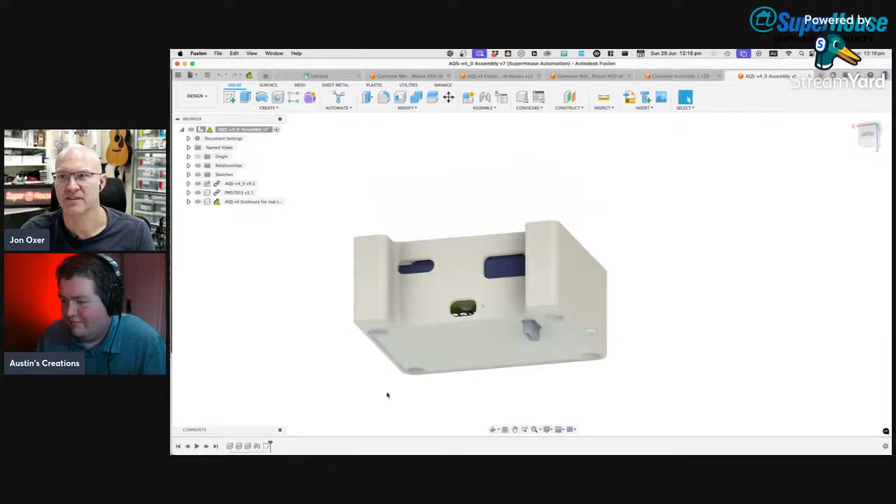Now, Tinker was just asking about something, and I'm going to do a quick screen share here. There was some discussion in chat about support for the AQS, and we were just talking about switching to an alternative.

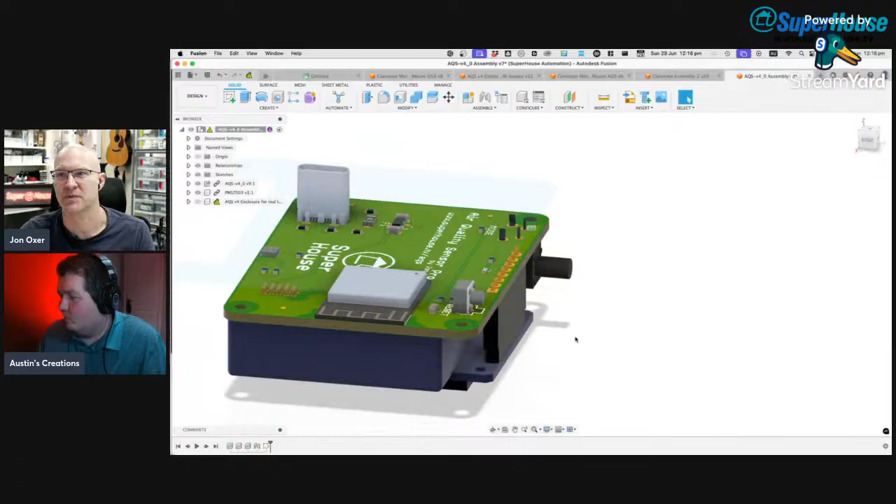Where's the enclosure? If I make the enclosure go away, this is the structure - this is actually for the previous version, not the most recent one. This is the 4.0 version, which has the vertical buttons on it. You can see the mode button there that protrudes, and the reset button designed to be accessed with a pin or something. That blue blob here is the particulate matter sensor, attached to the PCB, with the display in front of it.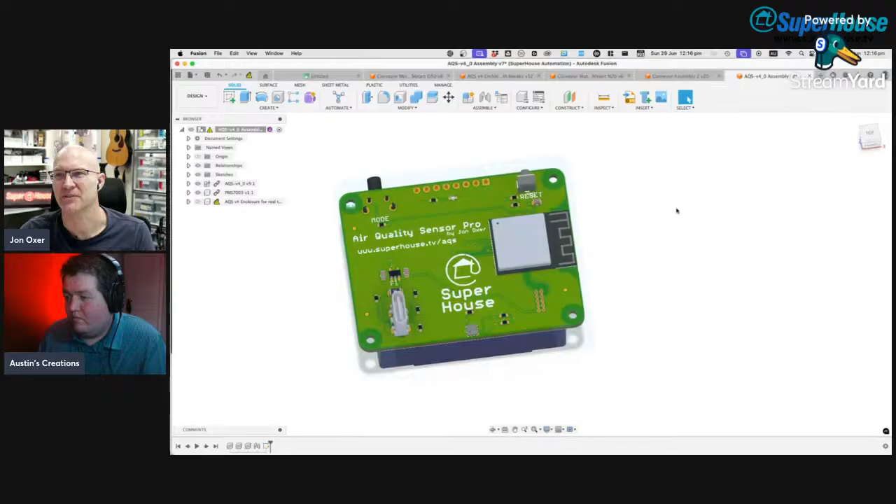So if I switch it to its normal orientation - unfortunately the lighting is not great, oh, it doesn't want to pivot the way I want it to. Come on, go that way. No, it won't do it. Okay, so rotate like that - no, I'm trying to get it onto that edge. I'll just get it like that.

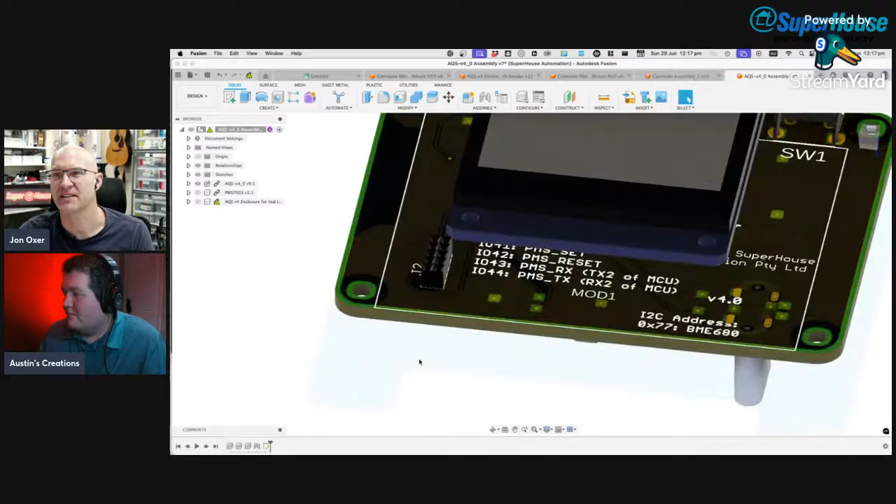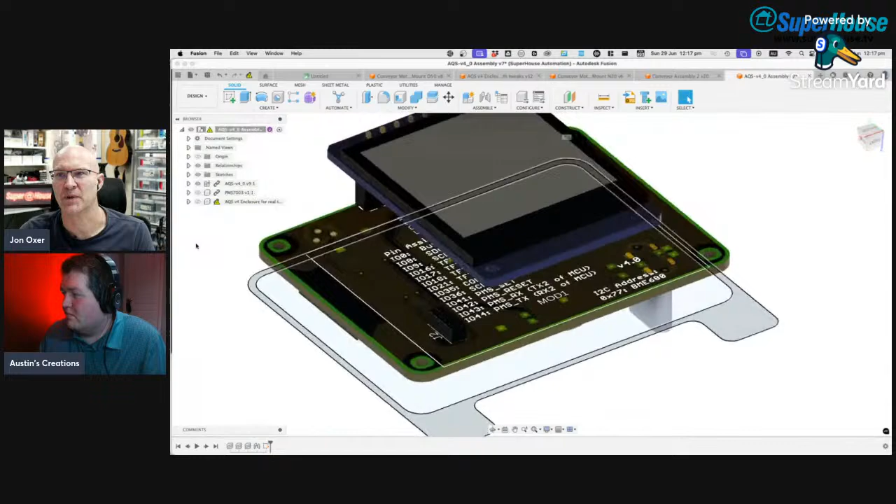All right, so if I hide this, that's the PMS, and you can see down here that tiny little connector it plugs into. It's an IDC header, I think it's 1.27 millimeter pitch - or maybe, no, I don't think it's 1 millimeter pitch, it's not quite that small, but it is very small. And as Austin said, it doesn't have much grip into the pins in the PMS itself. But the way the current design works, the LCD sits on top of the PMS and pushes against the front panel of the enclosure, which in turn pushes against the PMS, so the PMS is sandwiched between the PCB and the LCD.

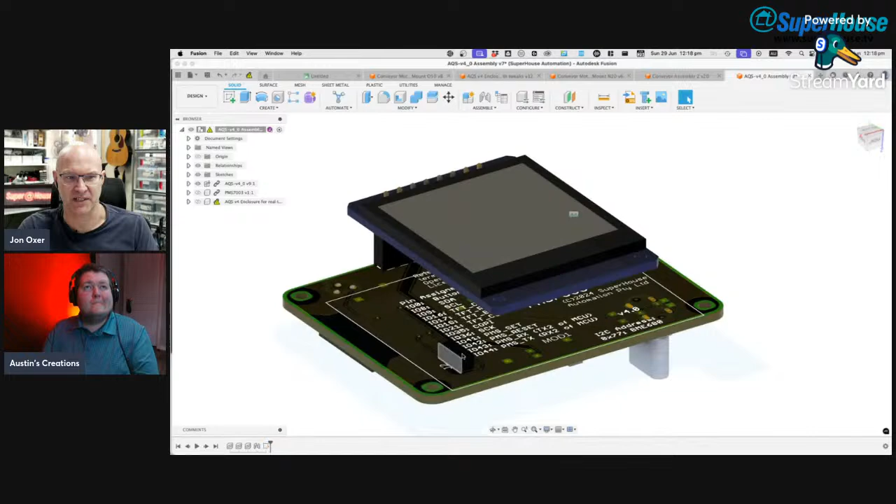So in theory it shouldn't be able to pop off this connector, but it really doesn't take very much movement. The problem is that with this one I've been playing with, my test unit, I've been moving it around and haven't had the back cover on, so the device wasn't actually pushed against the front panel - it had everything going against it. That's why the PCB had moved back slightly in the enclosure, and there was then room for the PMS to pop off this connector.

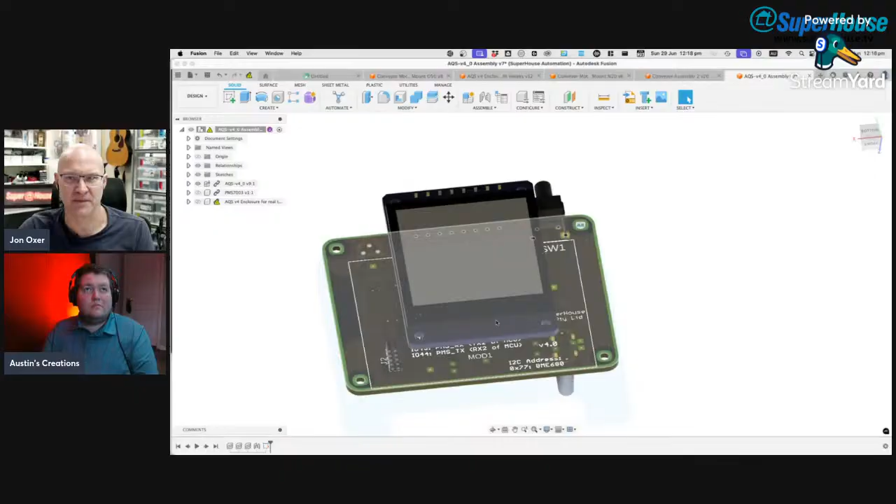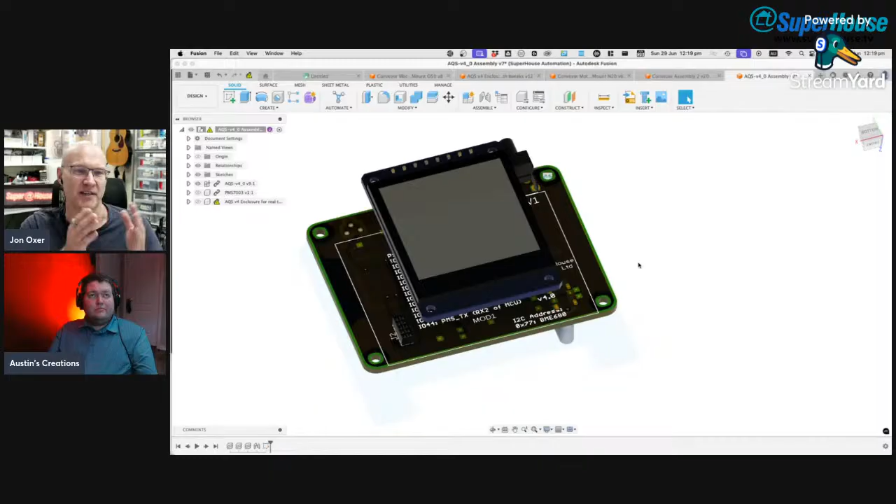There were some suggestions in the chat about putting stakes coming in from the front of the enclosure, pushing back against the PMS to hold it against the PCB. I don't think that would help in this situation because it's already being sandwiched by the LCD sitting on top of it, and the front of the case pushes against the LCD, which pushes against the PMS. The only problem, the reason mine wasn't working, is I didn't have the back cover on it, and it was all sort of flopping around loose.

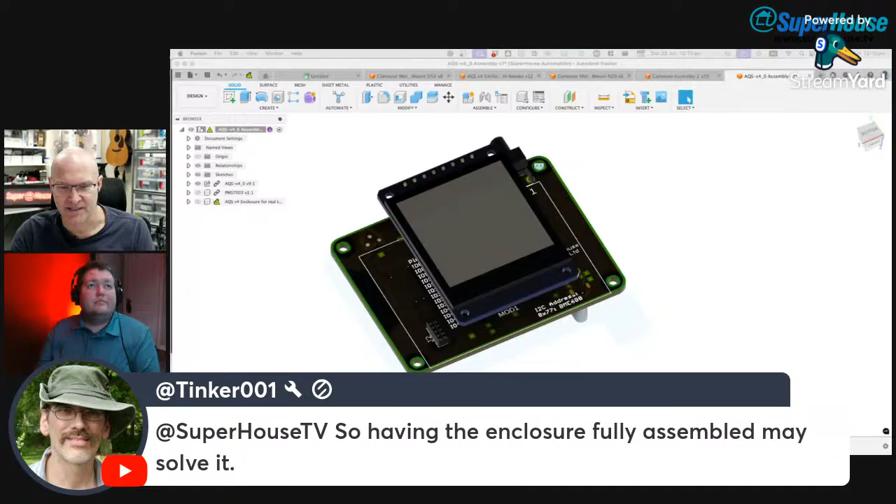I think all of these problems will be solved in the next iteration with the cover screwed on properly. Yeah, as Tinker said, having the enclosure fully assembled may solve it. Yeah, exactly, that's my hope.

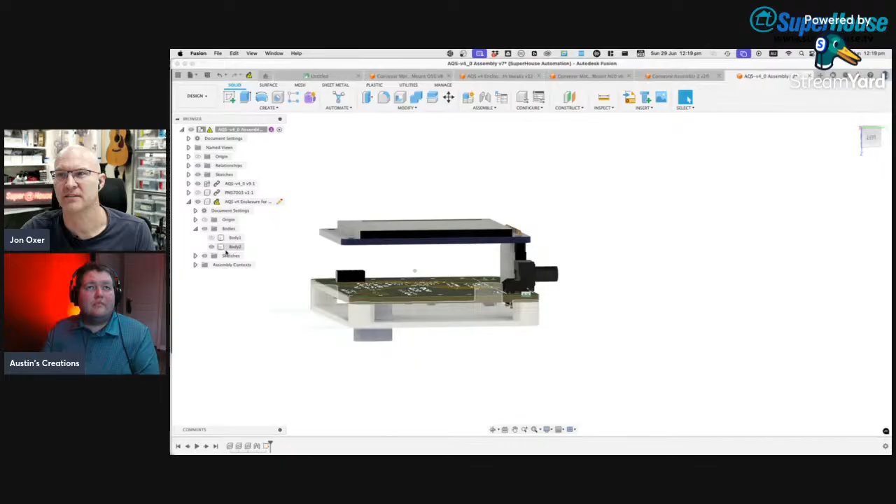The enclosure is in two parts. You can see the back cover there with the USB-C connector. The next update I need to make is to add holes on the back of it, here and here, for the two buttons. So that is the back cover that screws on and clamps the PCB into place, and that is the front that it sits into. If I hide the PCB, you can see that it's sitting down on these little pillars.

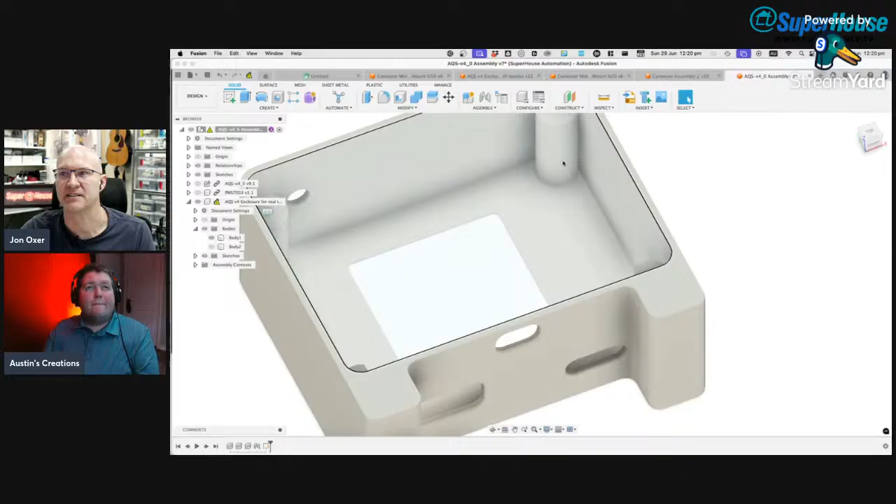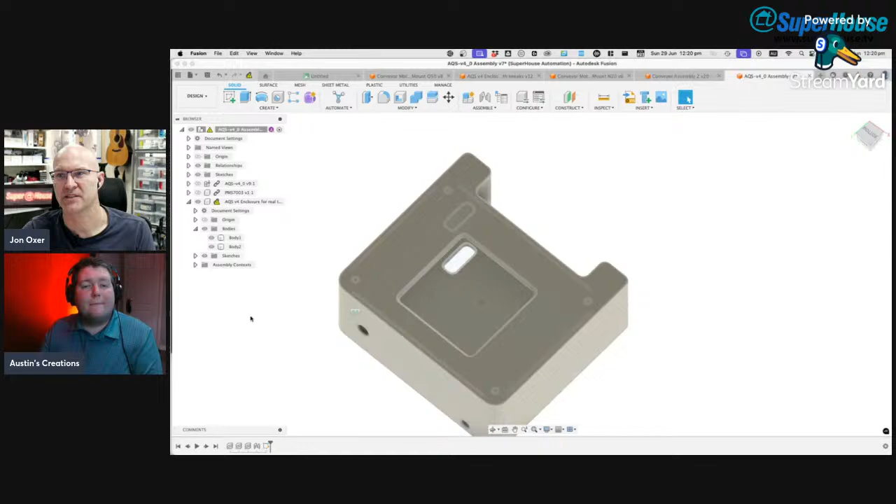When the PCB is flat against those pillars, the LCD is being squashed against this inside face, and the AQS is squashed in between them. So by tuning the depth of these pillars, I can control how much pressure is put into sandwiching all of that structure together. I just need to get the length of those pillars right, and then when the back is on and screwed into place and holding it, everything should be nice and secure. So I think that'll be fine, it just needs some little final tweaks and testing for the design.

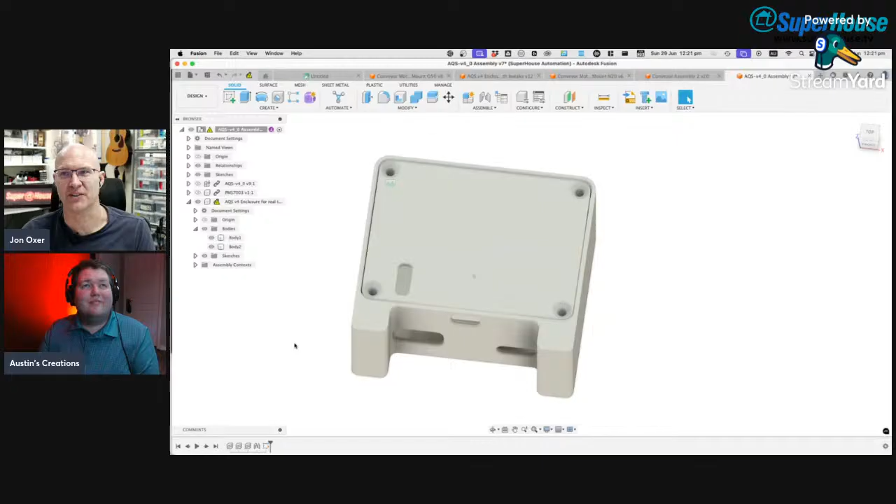I'll test the one that I just printed, and I need to make up some of the updated PCBs with the buttons that come out the back. Then I can send one to Austin. Austin, hopefully, my goal is to get this project to the point where I can say yes, it's done. That is now gated on me assembling the most recent version of the PCB and putting the holes in the back of the enclosure. Because your firmware is already done and working, I think we can then declare this project to be complete.